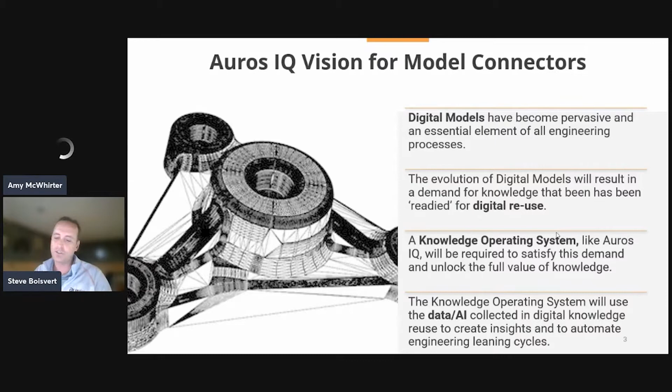So let's kind of get back into the whole connectors and model-based knowledge question. How do we get there? Jeff did a good job explaining this, but I'm sure you've heard us talk about how the knowledge-aware process is similar to navigation, and that in navigation we use GPS to detect context.

And then based on that context, the navigation app provisions the right directions to the user at the right time. It's very efficient. It's a fantastic tool to deliver knowledge at the point of use.

And for us, with what we're talking about now with connectors and model-based knowledge, we're trying to do the same thing. Except instead of navigation and GPS, we want to use the tools that you use to create your projects or products and detect context from them. And once we have context, we can provision the right knowledge into those applications to help you make the right decisions and get the right outcomes, and also produce insights for the next projects.

So how do we make that happen? Jeff talked a lot about the fundamental technologies we need to discuss, and for you beginners that just hopped over, I'm sure Josh talked about some of these as well. But the key things are the knowledge packet, the assessment control, and the knowledge processing engine.

These three things are going to enable us to really interact with other applications and drive information and knowledge into your modeling processes. And the way we do that, we're going to start by understanding what they are.

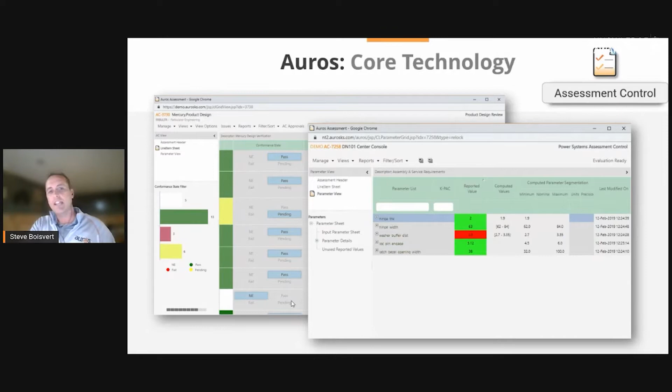The thing we want to do is detect context, and based on that context information, harvest the relevant information in the form of knowledge packets that apply. Based on that harvested information, we collect the key parameters from within those value tables. In the case of a CAD application, we want the key parameters that exist in those logical models inside the knowledge packet, and we provision those back into the CAD application.

Once we have those parameters into the CAD application, we attach those parameters to either other parameters that exist within the model, making a connection to existing parameters. Maybe we attach them to other attribute information of the model, or to a feature, dimension, or even a measurement within the model. The key thing is we're going to attach those parameters to something in the model.

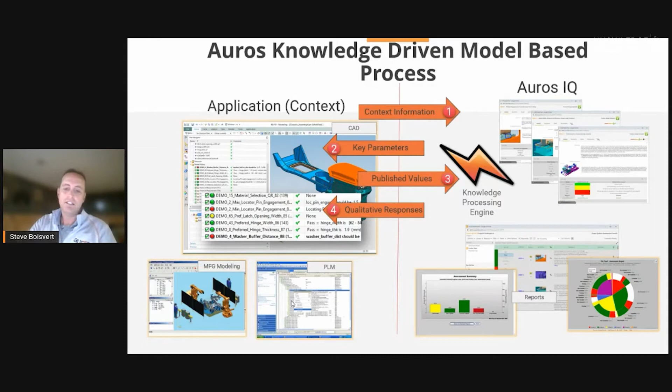These are the CAD connectors that Auros Knowledge System supports, that we've developed and deploy at customer locations. We have the big ones: NX, CATIA V5 - we don't have V6 yet, we're talking about developing that one - Creo, SolidWorks, and Autodesk connectors. For those in shipbuilding, we connect to Shipconstructor. We even have a general purpose CAD connector tool that doesn't depend on the specific CAD application, using the same principles from the knowledge processing engine I just outlined.

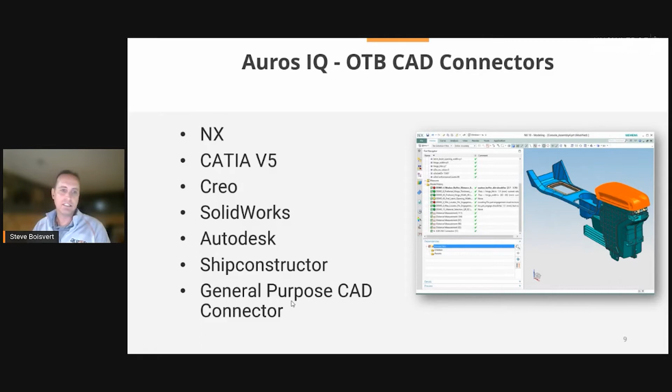So for today, what I want to show you is our newest CAD connector. We've spent a tremendous amount of energy overhauling our NX connector. The new NX connector does the same thing as the old one, just better, with a more refined user experience, but we still have broad-based digital knowledge provisioning.

We provision knowledge into the modeling environment. We can still drive models and assemblies, and check parts at the part or assembly level. You'll see how we connect the model and aspects of the model to the gold source of truth, being the knowledge contained in the knowledge packet. You'll see out-of-the-box persistence and reporting of conformance between the connector and the knowledge processing engine or assessment control. From that, you'll see how we gain parameter analytics - as values within the model change, those parameter values get stored back into the application, and we can develop insights and new learning from how that knowledge has been applied to a particular model.

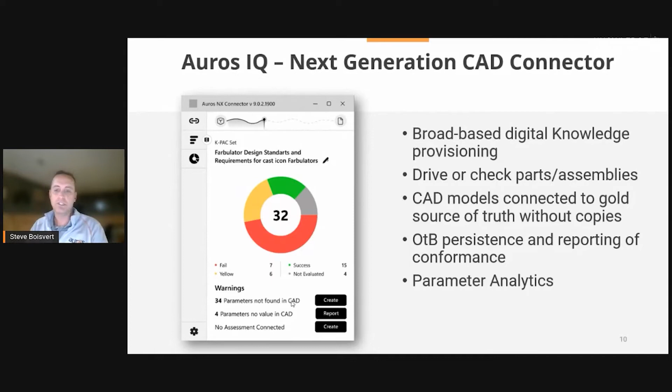One of the things we're going to talk about today, and you'll see tomorrow, is we have 4 use cases we've identified when talking about CAD connectors. The first one is starting completely from scratch with a blank sketch, bringing in parameters, and using the knowledge within them to drive sketches and develop a model. I'm not doing that one today, but it's extremely important, and you might see a portion of it in tomorrow's joint presentation with General Motors.

Use case 2 is whenever we have an existing model. It could be an assembly or a particular part, and that part may or may not have parameters. This is a common use case where we want to take an assembly or part and check it based on the knowledge we have, and that's the use case I'm going to demonstrate today.

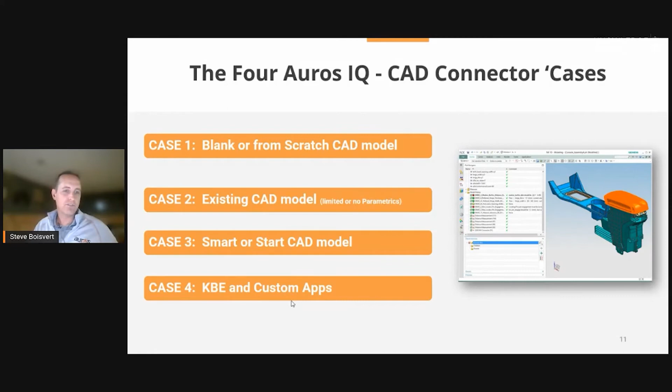Use case 4 is whenever we want to integrate knowledge-based engineering or custom applications with knowledge from within the connector, blending the two concepts together—extremely powerful. I've touched on that one in the past as well, but it's not going to be the focus today.

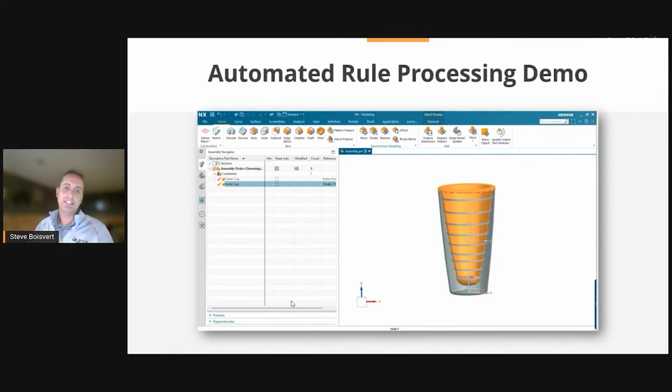Today we're going to look at the NX connector and the new version of our Auros NX connector. So with that, I'm going to hop out of the PowerPoint and start doing some real stuff. I'm going to close this and open NX.

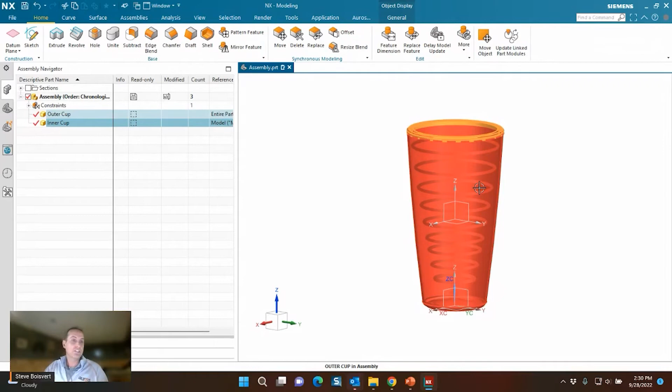You see here I have a model open—it's an assembly, a cup. If you were part of our IKAA conference maybe 4 or 5 years ago, we did a whole demo series on the Cool Cup company, developing demonstrations around the processes a cup company might use. I have my Tervis cup here, and that's where the inspiration came from—simple, but complex enough to demonstrate functionality in a meaningful way. So today we're using the Cool Cup, and it's an assembly, but we're only going to work on the outer cup.

So I'm going to turn the inner cup off. Now, going back to fundamentals, we need to start from knowledge. So I'm going to open up Auros, and we're going to look at the knowledge we're going to apply to our Cool Cup.

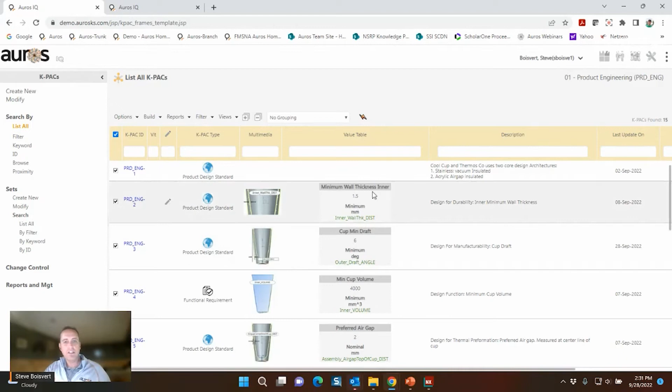For that, I'm going into my product engineering community of practice, where I have all of my knowledge packets around my Cool Cup. I've developed a knowledge packet set, and for our demo I've already defined the context. I'm shortcutting things in the interest of time, where I'm saying I only want to verify these 3 knowledge packets: an ergonomic standard and two product design standards—one for grip width, one for depression height, and another for wall thickness.

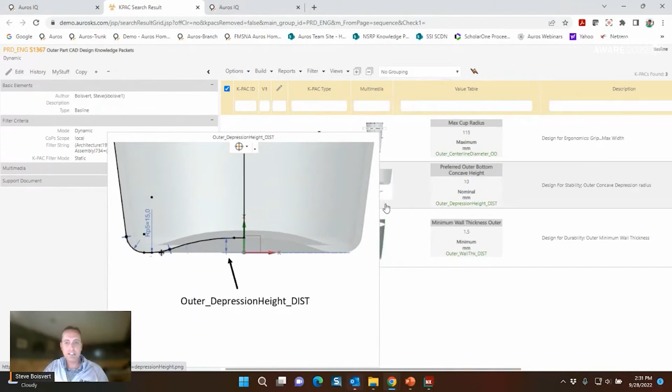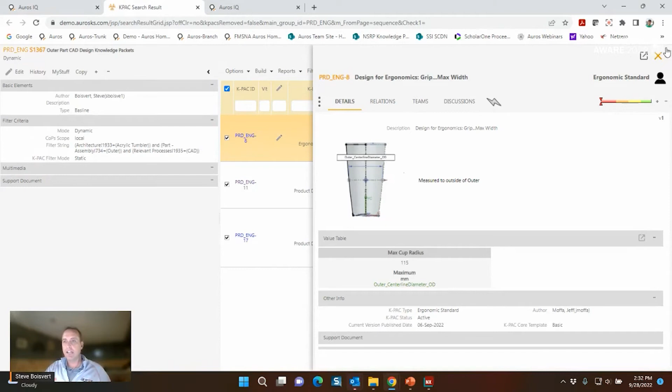All of these have value tables. Each of these knowledge packets has a value table. You can see this one talks about a max cup radius, and the resulting parameter of the max cup radius is this outer centerline diameter, OD. Each of these value tables has a parameter, and those are the things we're going to share into NX, into our outer cup model. So let's hop over—here's the knowledge we're going to use. Pretty simple demonstration, so let's hop into NX.

Now, before we get started into the model, I want to show you a couple things about the model.

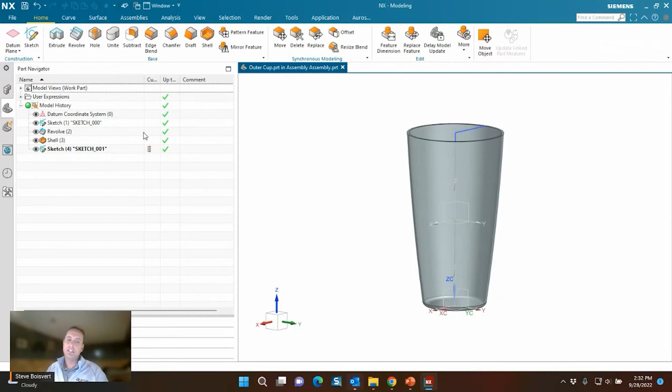So I'm going to hit this part navigator, and in the part navigator you can see my sketch history, my part history here. One of the first things I want to show you is this is use case 2. It's not a completely dumb part.

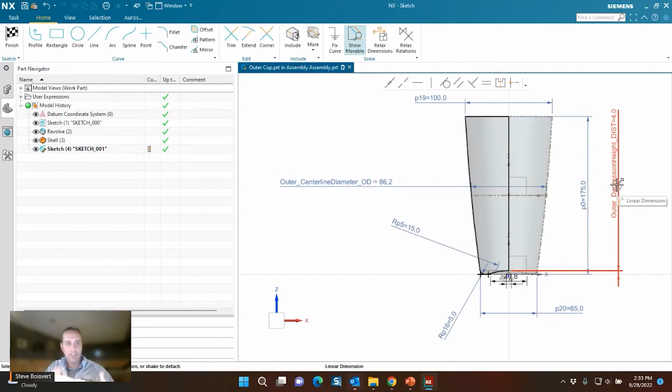I do have some parameters already embedded into the model, and you can see that here in the sketch. I have the outer center line diameter defined for that feature, and I have this depression height already defined, which is important when I show you how, when we connect the knowledge to the model, things are going to start happening, because I have some of these parameters already defined. So let's get into it.

From within the environment, I'm going to click on my Auros tab, and I'm going to open up my Auros connector.

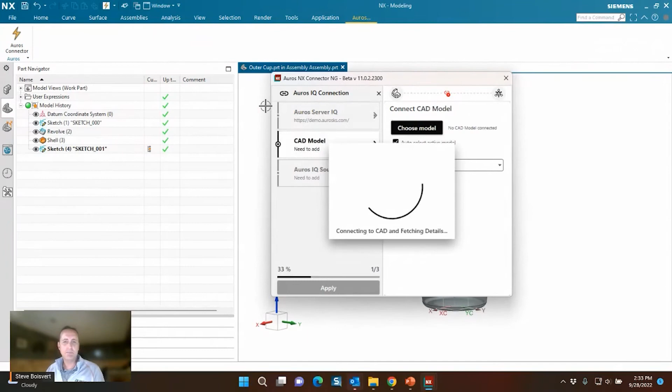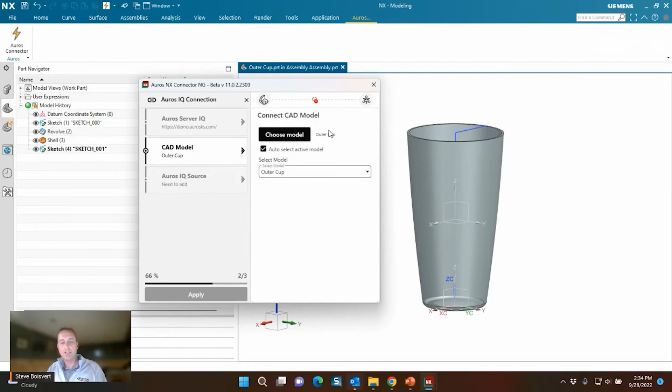So now it's opening the new version of the NX connector, and you can see some things starting to happen. The first thing that happened in the background was it actually knows who I am, right? It knows who the user is, and it knows what instance, Auros IQ instance, I'm trying to get my knowledge from. The second thing that happened is it found the active part. Remember, it was an assembly, but I made the outer cup the active part, and it knows that I want to provision knowledge into this outer cup.

The third step I got to do is tell it, in this particular example, what knowledge I want to connect to. And we looked at that set. It's 1367, and I'm going to connect to those knowledge packets.

You can see what happens when I've connected to our knowledge source. We get a response from the connector that says, all right, I found the knowledge packets. There's 3 of them. I have 1 ergonomic standard and 2 product design standards that I'm going to provision into this outer cup model, and it results in 3 parameter evaluations.

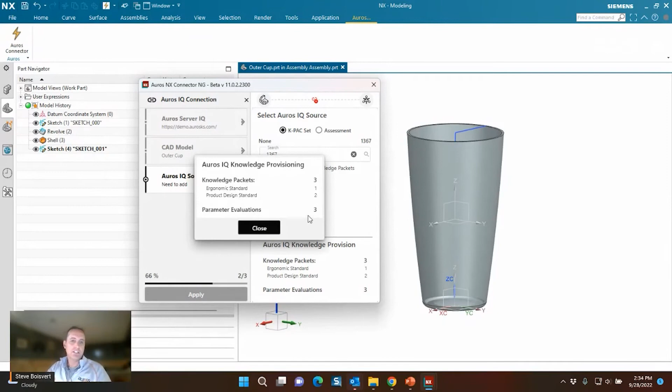Okay, that's good to know. I'm going to hit apply. And now what's happening is the connector is communicating with Auros IQ and the knowledge processing engine, and it's provisioning in those parameters that were part of those knowledge packets.

You can kind of see what happened from there. Those 2 parameters that I already had in the model matched parameters that I already had in those knowledge packets, so instantly they began to evaluate themselves. And you can see that here with 1 red and 1 green.

In our Auros NX connector you can see basically the set that we're connected to, and we can see the evaluations. You can see we have a pass, a fail, and an incomplete. We have some warnings on here, and it's actually telling me one of the parameters that was in that set isn't found in the model.

I can also see that in the part navigator now, where I have a representation of my pass, fail, and my broken link to knowledge that the application is trying to provision into this connector.

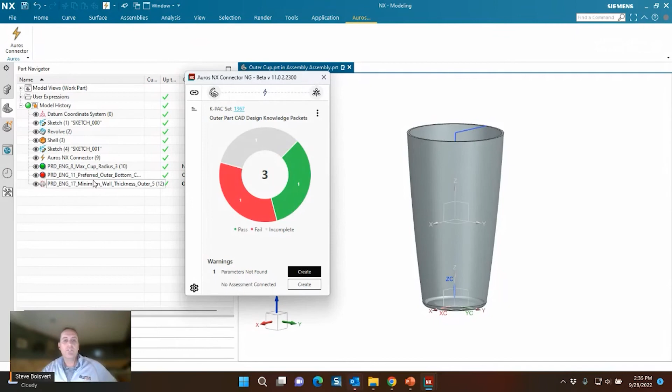So one thing we can do is start to deal with these things. If I click on the red items, it shows me which item is red. It's my outer depression height distance that's red. And if I expand that, I can see some details.

I can get directly to the knowledge packet in case I have some questions about how this is supposed to be applied, what the intent of this particular knowledge is. I have access directly to the knowledge from within the CAD application now.

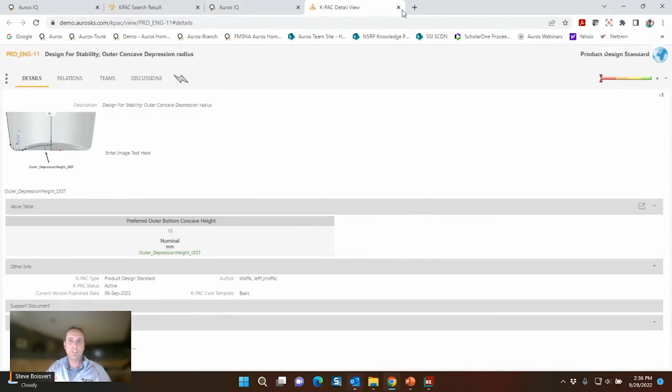Let's hop back over to our connector. I'm getting all sorts of insights from here. I'm seeing in the model that the depression height is 4 millimeters, but the rule is telling me it should be at least 10. And I'm getting an end user message provided from the knowledge processing engine explaining why I'm failing: this value should actually be 10, but it's only 4, hence I'm failing.

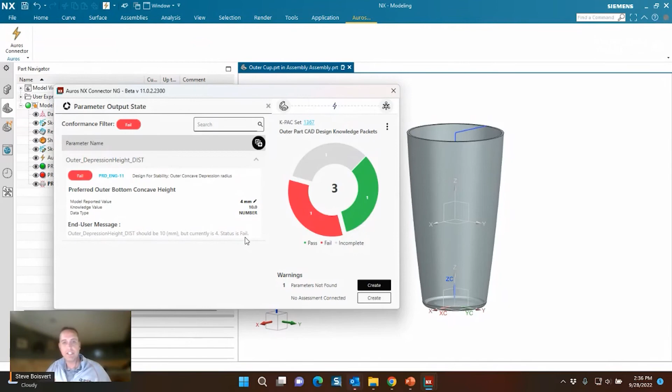So let's deal with the red first, and then we'll work with these other things. The thing we're working on here is this depression height, and what I want to do is change it. Let's say we're early enough in our design phase, maybe I'm in the concept phase.

I found out that hey, this should be 10. I had it set to 4. Maybe I didn't know any better, but now I do, and I want to just change it right in the model. So I'm going to change the value for outer depression height, and I'm going to drive that from the connector into the model. You're going to see two things happen: one is that new values go into the knowledge processing engine, getting reevaluated.

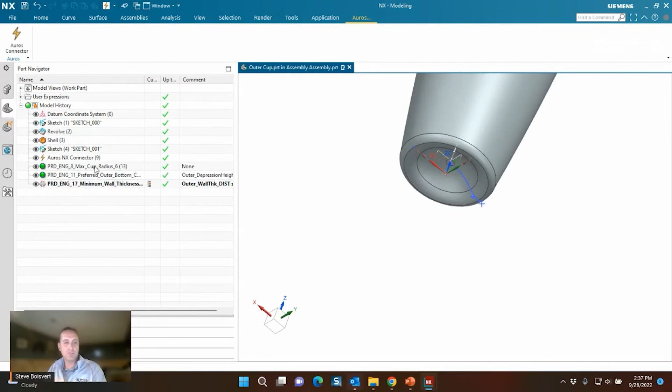And now we no longer have a red state within our ring chart here. That value got pushed into the model, and now our model has been updated with the correct depression height. So now our part navigator, you can see here, we have a visual representation showing two things are now green, which is really important. We can see things are passing as they should.

But I still have this one thing I need to deal with. I have this warning that there's a parameter not found. So let's take a look at that. It's telling me that the outer wall thickness distance is a parameter that's coming in from the knowledge source that isn't part of my model.

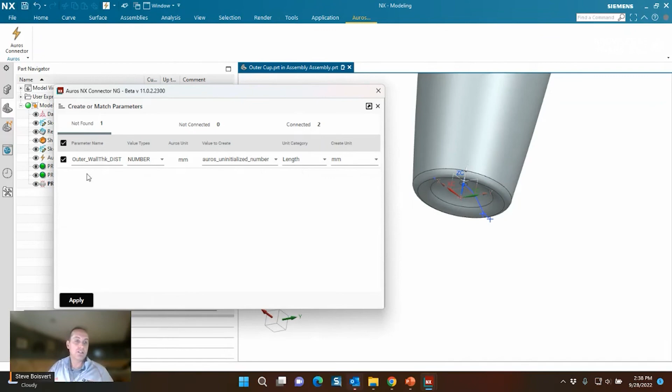So what I want to do is make this part of the model. I'm going to hit apply. And what's going to happen is it's no longer going to say parameter not found, right? So now it's taking that parameter and putting it into the model.

Now it's telling me the parameter is not connected, meaning it's not doing work. It's part of the model, but it's not attached to a feature, an attribute of the model, a dimension, a sketch, or a measurement in any way. So it's not really doing work. It's not connected to anything.

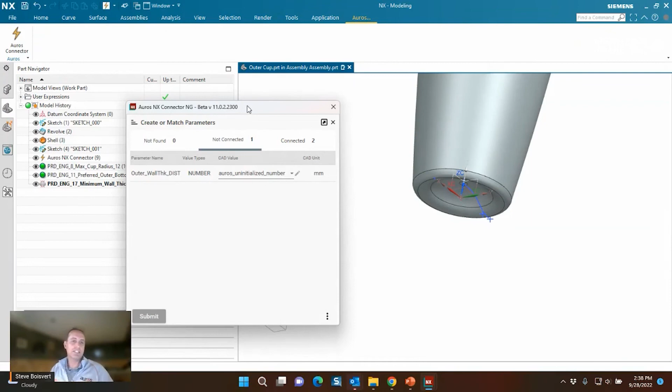So let's address that. Let's take a look at this. We have our cup and our connector here, and it's telling me this is not connected. The outer wall thickness isn't connected. So for this particular example, I just want to take it and use a measure.

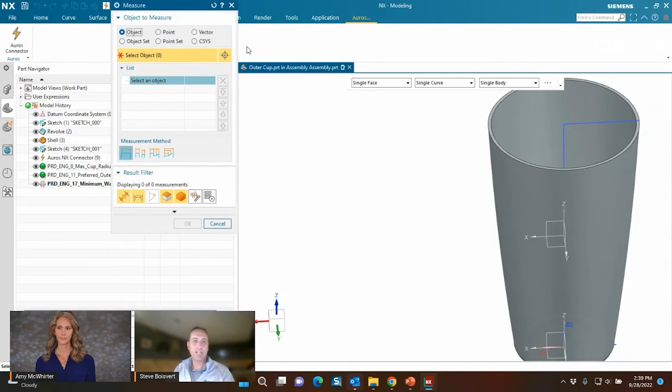I'm going to take this particular parameter and attach it to the thickness of the cup by selecting this edge and this edge. Let's zoom in a little bit so I can grab the right edge. And it gives me a distance of 2.033.

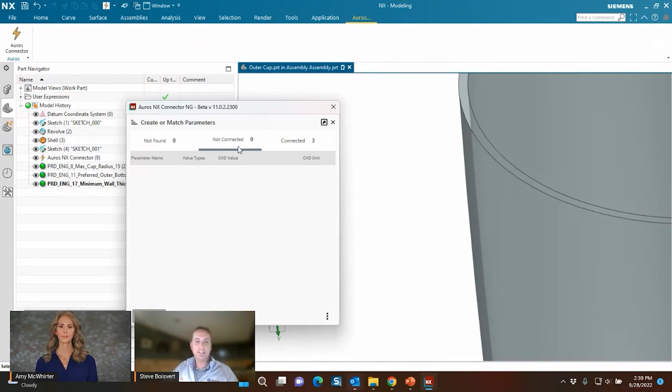I hit OK, and now that parameter, outer wall thickness distance, is attached to a measure, and that measure stays persistent. So as that wall thickness changes, maybe the shell feature changes, that value will stay persistent and react. So now I no longer have a parameter that's not found, and no longer have a parameter that's not connected. Everything's connected and is creating evaluations, and everything is green.

So one final thing as part of this demonstration, I want to write this back into Auros. I want to save this. I want traceability that I applied these. So what I'm going to do is create an assessment control.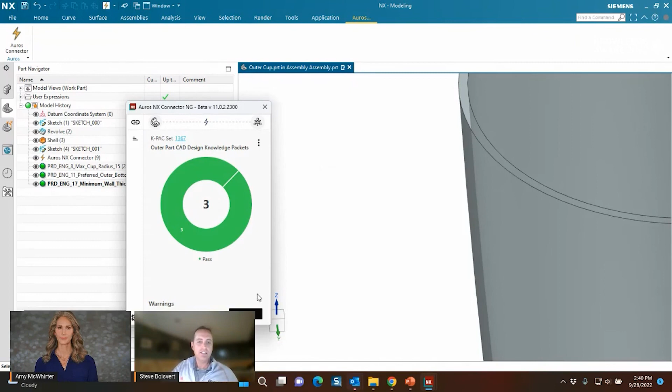I'm going to choose my community of practice, right? And that was product engineering. I should have picked something more towards the top, but I have my list of product engineering. Where is it?

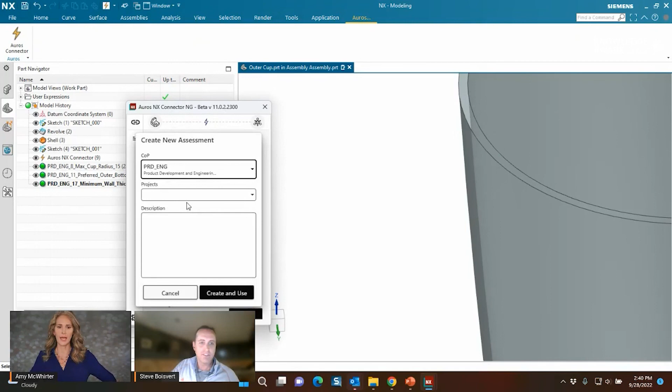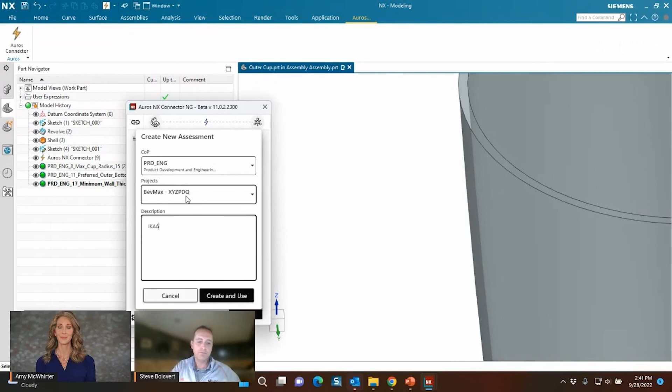Steve, John is wondering, just making sure you didn't already answer this, but does the product need to design with the parameters that are set up in the K-PAC? No, you could define those in the model and then attach the parameters that are in the model to the parameters in the K-PAC. So it doesn't have to start with the parameters that are in the K-PAC.

Thanks, and just going to — we have like one more minute. Yep, yeah, last thing. I'm creating the assessment control. You're going to see now we're tied to an assessment.

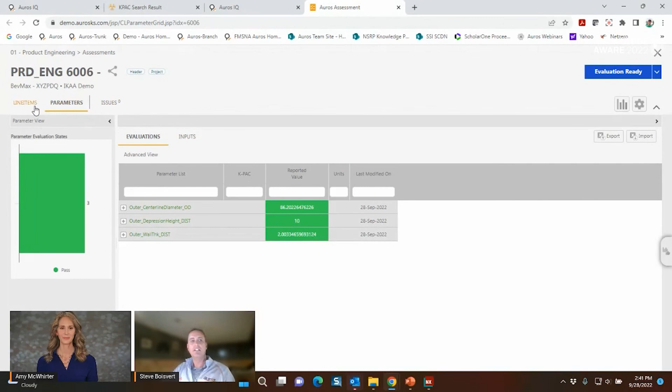So I'm going to open that assessment. We're going to have all of the values that were published in CAD pushed back into the assessment control. I have traceability. And then one last thing, because I talked about data synchronization.

What happens if I change a value? So now let's say I make that 8. All right, let's go back into our model. I'm going to say, all right, this one is now 8. I'm going to submit that change, right?

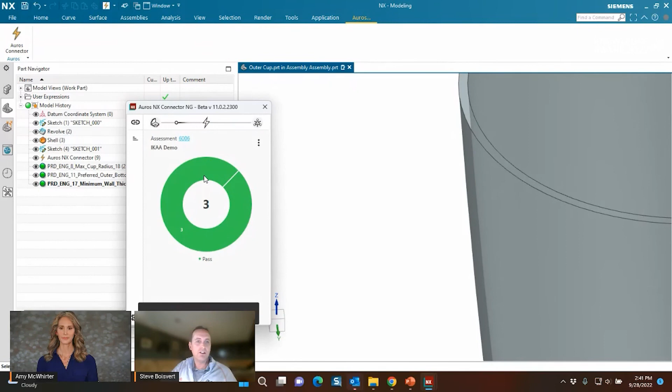This might change to red, but I want to show you how the connector reacts. And it'll tell me I am no longer synchronized. The values that I've changed in CAD no longer represent the value that I have in the assessment control. So the applications are smart enough to know when they are out of sync.

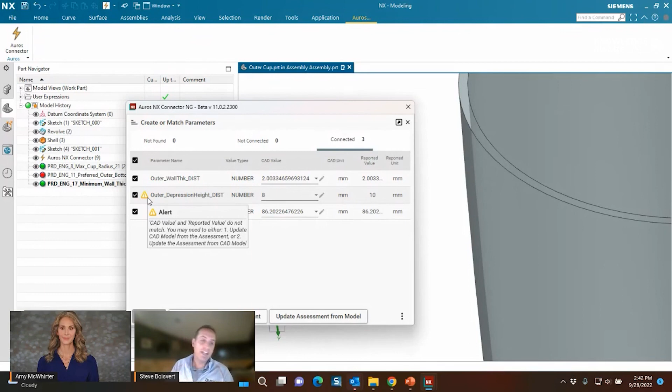So with that, that's where I want to leave it for today. We have another demonstration with using the same connector tomorrow. It's going to be a little bit more extensive than what I went through today. But hopefully you can see how we can provision knowledge into a modeling environment, how the application of that knowledge is provided, and how it reacts whenever there's any type of model change or assessment change.